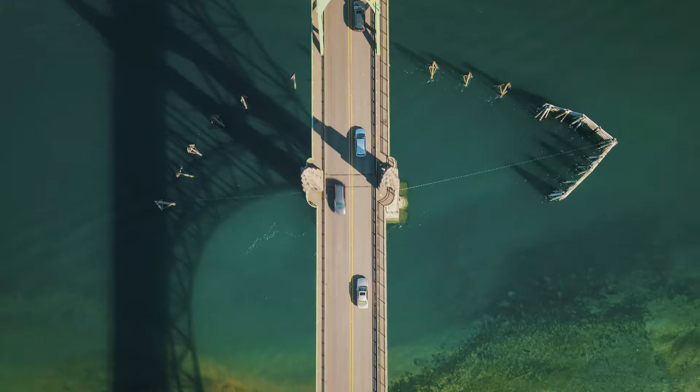Bonifica SPA and Hitachi Rail STS, leading companies in the field of civil engineering and transport, have collaborated for several years in the design of railway infrastructures.

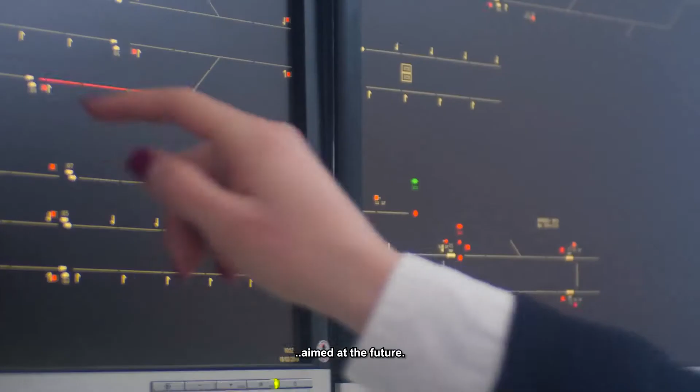Given the future scenarios and given the quality of the relationships established, the two companies have decided to invest in an innovative pilot experience.

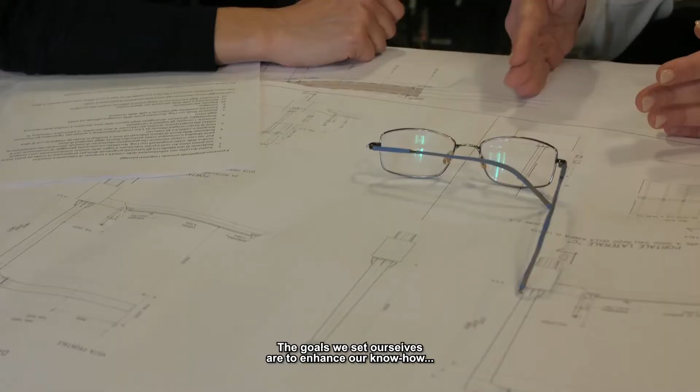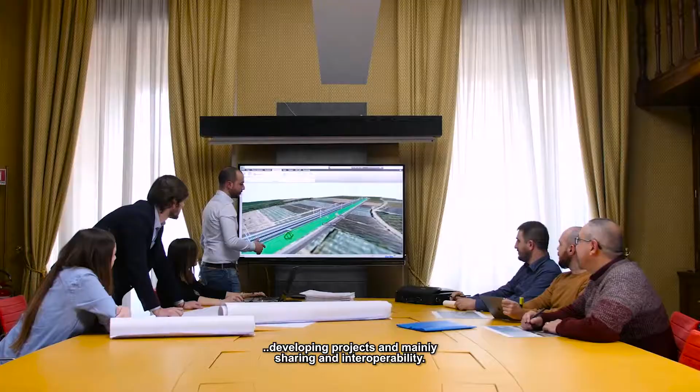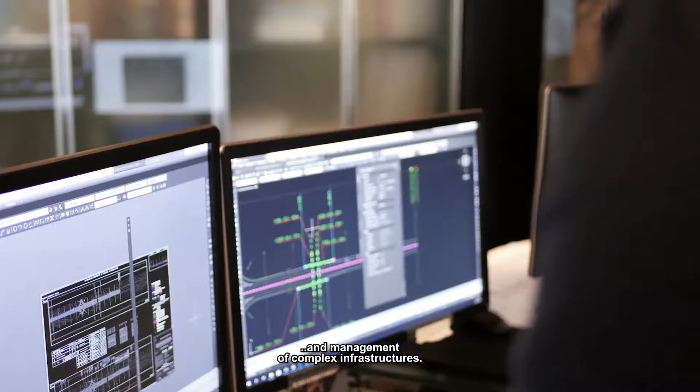BIM, which stands for Building Information Modeling, is the new reference model for the design, construction and management of complex infrastructures. This new design system allows you to collect, combine and digitally connect all the relevant data of a work with the three-dimensional models that represent and define it.

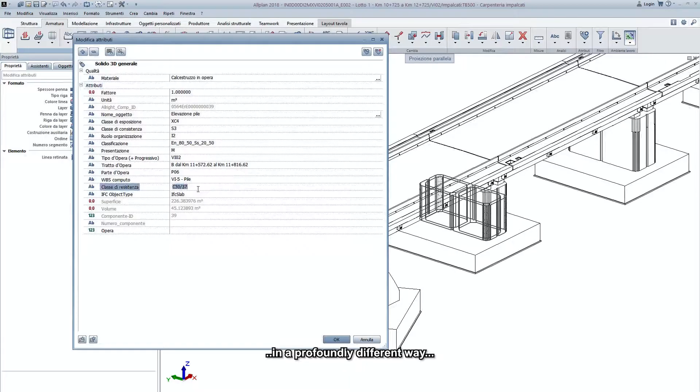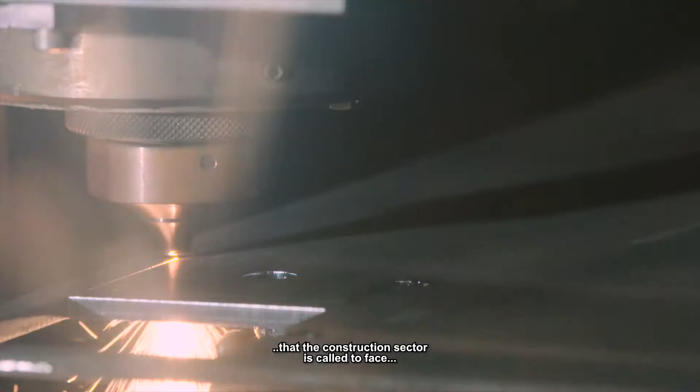The introduction of BIM marks the most important revolution that the construction sector is called to face in the era of Industry 4.0.

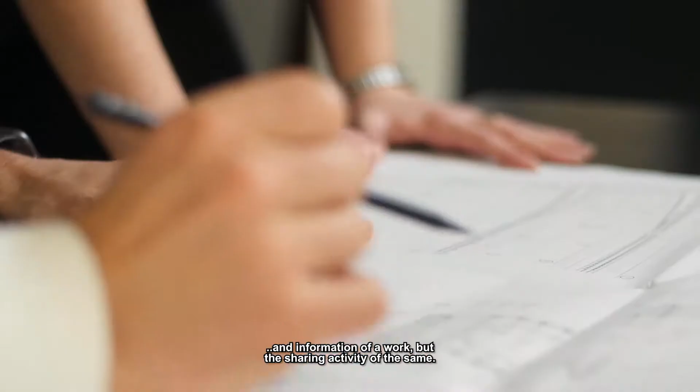The first step consists in the elaboration of a three-dimensional model through specific software. The model is navigable and allows you to easily identify any part of the work, to query each component and view all the associated information.

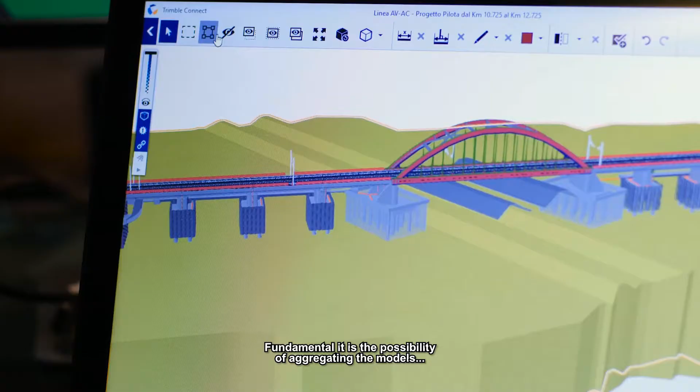Fundamental is the possibility of aggregating the models of the different disciplines in a data-sharing environment, analyzing the critical issues and solving possible problems of feasibility of the work already in the design phase.

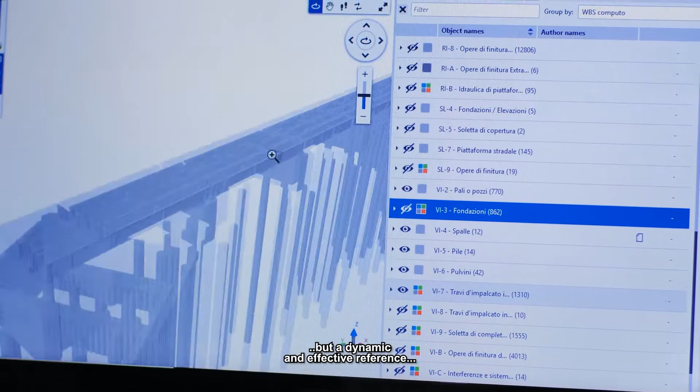The project model becomes a work that is no longer static, but a dynamic and effective reference throughout the life cycle of the work, from planning to construction of the work to maintenance and management for any reuse.

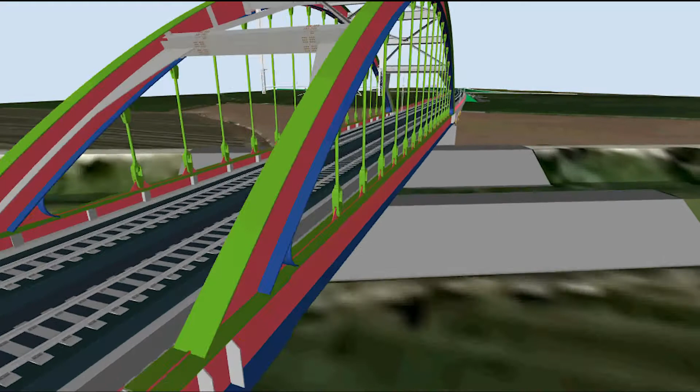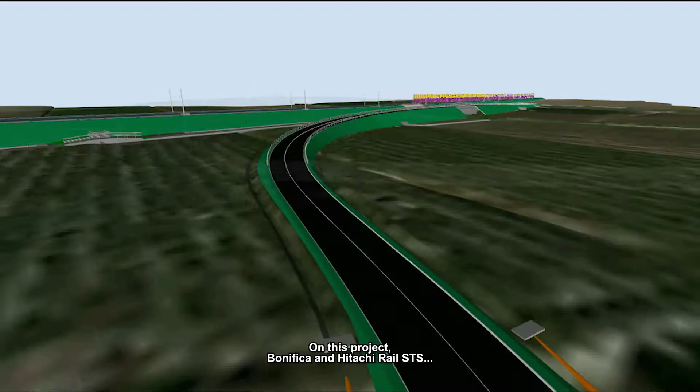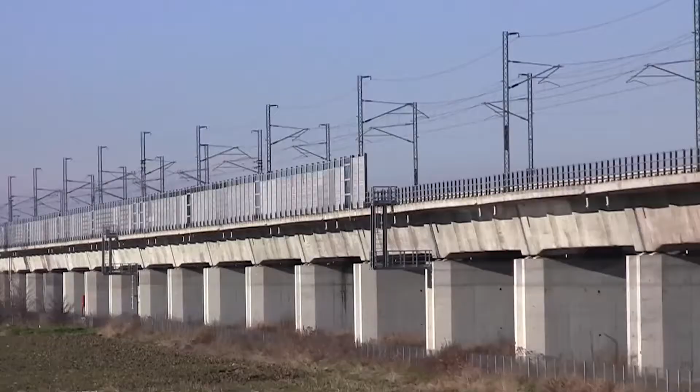We are on a 2-kilometer stretch of the Verona-Vicenza-Padua high-speed line. On this project, Bonifica and Hitachi Rail STS have developed an innovative experimental experience. For the first time, BIM-oriented design methodologies have been applied to a linear infrastructural work with the aim of integrating civil railway and plant works.

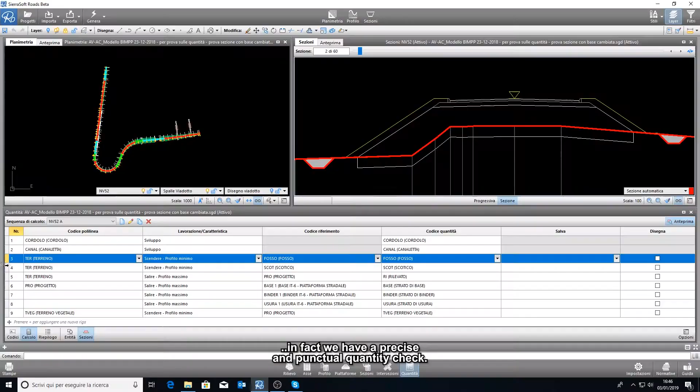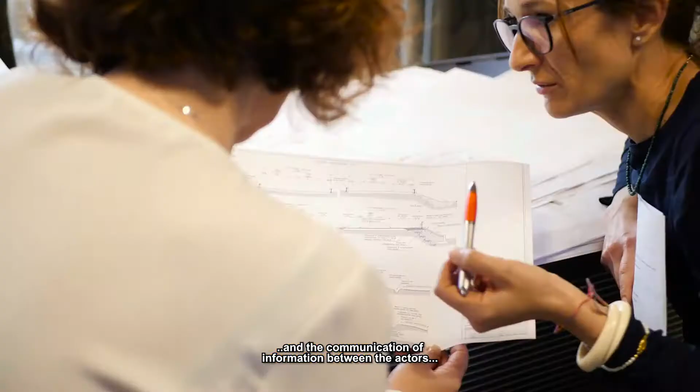BIM improves the management of workflows and the communication of information between the actors involved in the design, implementation and management of the work.

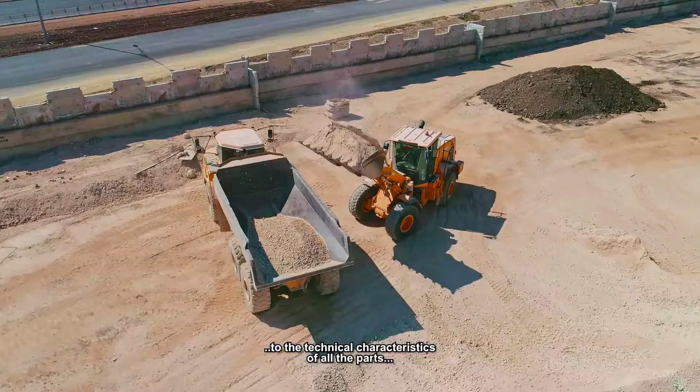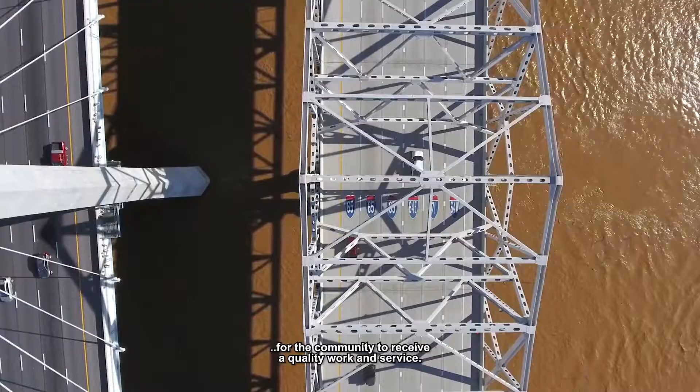The preliminary logic with which the client approves a project proposal changes and increases the guarantee for the community to receive a quality work and service.

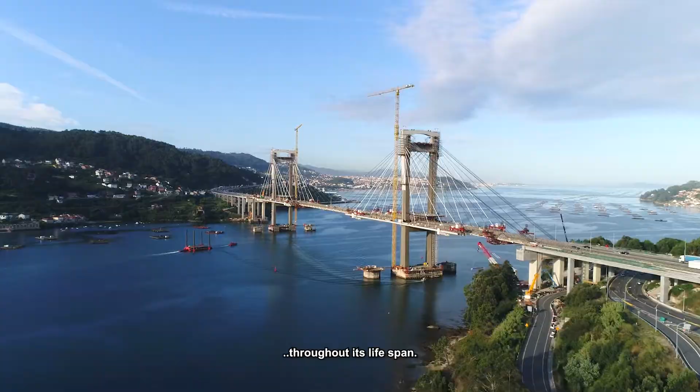The downsizing of costs and design times, the drastic reduction of variants, the improvement of communication, all this together with a management system based on transparency will make BIM the reference system for the construction industry. And Bonifica and Hitachi Rail STS, thanks to the experience acquired, will be protagonists of this future.